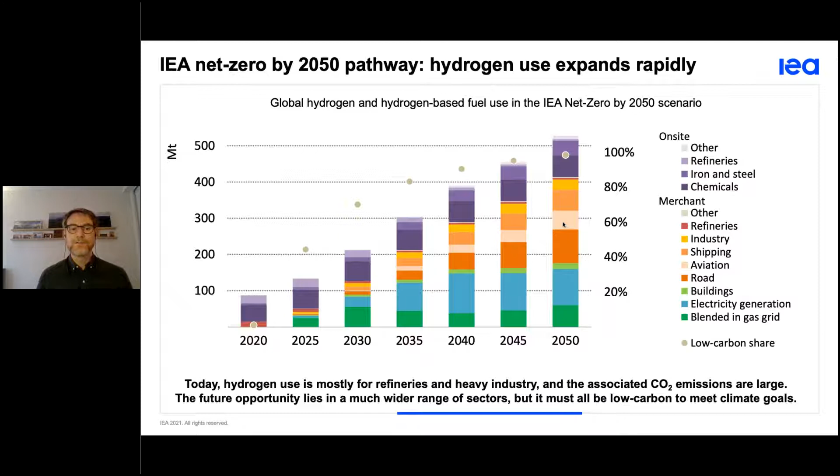So if we are seeing this amount of hydrogen in our model, there must be a good reason. And I've taken a moment on the next slide to put together the reasons for that. Why is there so much interest in hydrogen at the moment when perhaps there wasn't a huge amount of interest 5 years ago, let's say? And it's still the case if you do a Google Trends search on hydrogen, you'll find a much bigger peak around 2004, I think, than you find today. But there was a trough, and now there's an enormous amount of interest again.

And the main reason is just that if you use hydrogen for energy, whether you're using it in a fuel cell or combusting it, it does not produce carbon dioxide. And that's crucially important when we start to talk about these pledges that countries are making that aim for net zero emissions by 2050, in the case of China, 2060. That is really forcing attention onto pushing fossil fuels right out of the system at the point of consumption, and it forces people to really think about the role of hydrogen. If countries are making a net zero pledge, clearly Canada is one of those countries, but they're not the only one, then they're in the world of the 500 million tons of hydrogen in our model.

I have then said, okay, well, let's unpack that a little. Why hydrogen in terms of the things that it can do for us? And we think that there are 6 reasons why hydrogen is tackling challenges that it's very, very hard to tackle in other ways. Hydrogen is reaching parts of the energy system that are hard to decarbonize, so-called hard to abate sectors in some cases. In other cases, it's related to flexibility.

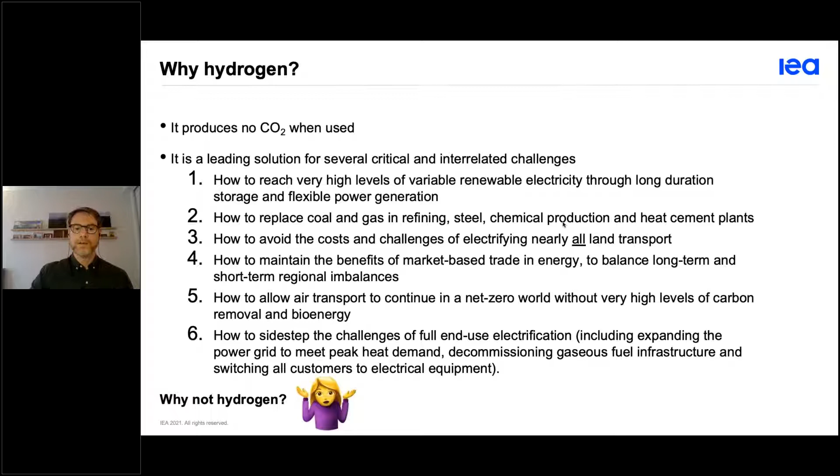So I am going to now just shift gears a little bit, try and give a bit of a rundown of where we are today and then a couple of the challenges that are faced. We are producing at the IEA this year our first global hydrogen review, which will be released in September, which is going to become an annual publication that's going to track hydrogen. We've previously been tracking bits and pieces of hydrogen in our investment reports and other parts of IEA outputs. We're going to bring it all together. And here's just a quick summary of some of the things that we see on that dashboard.

The momentum around hydrogen is really unprecedented. And I think it's really worth saying that this could be a hype cycle, but it's going to be a much bigger one than we have ever seen before, and it's unlikely to break and go back into the trough that we saw maybe 5 years ago. We've got countries that are publishing hydrogen strategies. Canada is one of them, but we know of 18 under development that would take the total to 30 around the world.

I've been this week trying to add up some of the equity that's been raised by hydrogen companies, whether they're startups or some of those that are post-IPO. And I think that since 2019, around 8 billion has been invested directly in companies that are producing hydrogen equipment as their main line of business, which is quite remarkable, to be honest, for a technology or a market that isn't really off the ground yet.

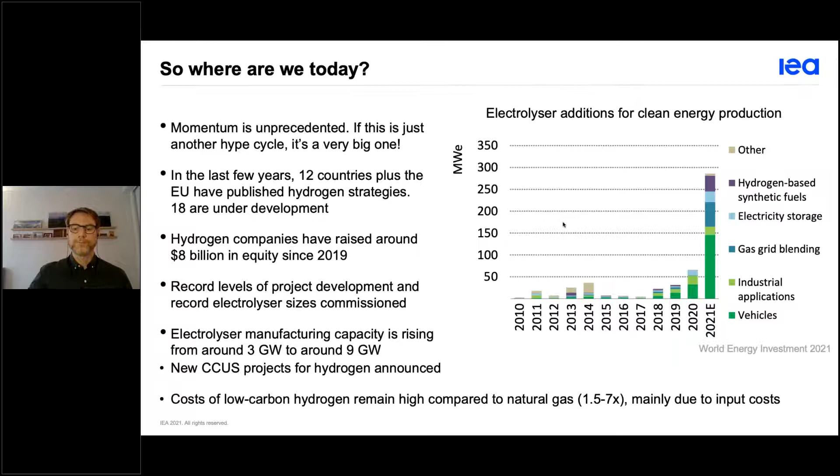So I'd like to leave you with a few thoughts on where next for hydrogen. I mentioned the Global Hydrogen Review already. That's our little where next, but that's going to include some policy recommendations. And we're going to be talking about things like how do you create bankable and dependable demand for the equipment in particular, for getting these investments in the supply chain that allow the manufacturing capacity to get built.

And we've really seen some quite remarkable developments. Countries like Germany, just yesterday, I think it was, announced a new auction mechanism that would give people certainty over the price that they might be expecting to get for hydrogen produced, and try and stimulate demand for the equipment itself. We think that the equipment, the manufacturing of the equipment is the key thing to watch.

But on the demand side, existing hydrogen demand is the right place to start, where the infrastructure is already in place and disruptions to contracting in the value chain can be minimized. I just wanted to mention that the CEM Hydrogen Initiative of the Clean Energy Ministerial, which the IEA runs, is looking at that in relation to ports in particular.

Certification of hydrogen is my number two, and the International Partnership for Hydrogen Economy is the intergovernmental group that is looking at that. And we'd like to see that cutting across all low carbon gases and looking at upstream methane emissions and biogas alongside hydrogen certification and renewable green certificates.

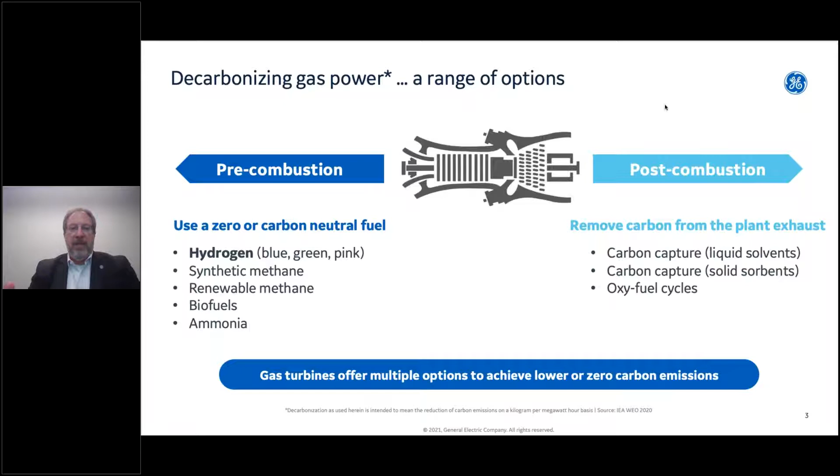But we also should recognize post-combustion. And post-combustion basically says, don't change your upstream fuel infrastructure at all. Continue burning natural gas as you've done in the past, but before the emissions from the gas turbine reach the environment, capture them. And there are a lot of technologies available today using both liquids or solids that have an affinity for capturing carbon. And once you've captured the carbon, you put it to industrial use. You can use it for enhanced oil and gas recovery, or just do sequestration and storage. So lots of technologies that are available here, again, if we think of this as a suite or an ensemble of tools.

One of the questions that we get asked a lot is, can you leverage hydrogen as a power generation fuel? And the answer is, not only can you do it, it's been done for 30+ years all over the world. General Electric, as an example of the industry, has more than 75 gas turbines that have run on hydrogen or hydrogen blends. Those units have accumulated more than 6 million operating hours in a variety of traditionally industrial type sectors: steel mill, refining, places where there has been extra hydrogen, either as a waste product or such. And we've done it from concentrations as low as 5% all the way up to 100%.

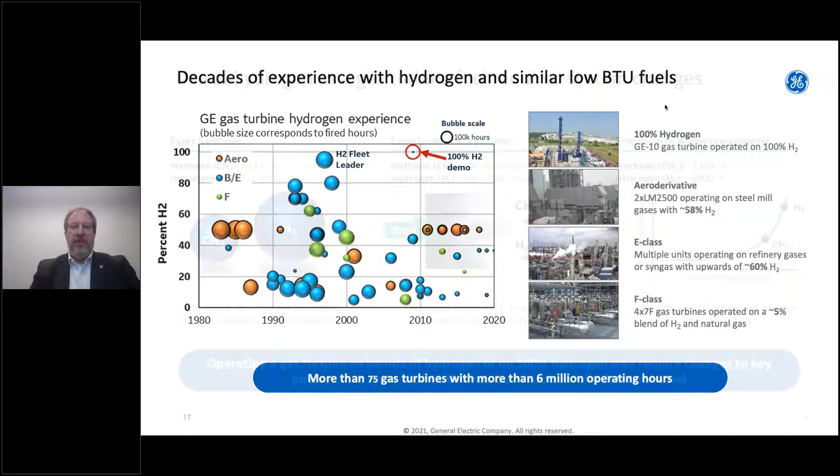We have gas turbines that have in excess of 100,000 operating hours on fuels like this. And so this is not a new concept or technology. What's new is that we're not talking about a waste fuel. We're now talking about intentionally generating large amounts of hydrogen for the sole purpose of using that as a carbon-free or low-carbon fuel for producing power. And that's the real change in the industry. The gas turbine ultimately doesn't care whether it's blue hydrogen or pink hydrogen or gray or white. It only cares what comes into it in terms of energy content and composition. So that's just good news as we think about leveraging this technology and reaching our zero carbon or net zero carbon goals.

I want to reflect on the fact that hydrogen is not a drop-in fuel. You just cannot take hydrogen into an existing system, whether it's an internal combustion engine or a gas turbine system, and just swap it out for methane. It has different energy densities, it has different combustion characteristics, both in terms of reactivity as well as the temperature it burns at, and those have implications we need to consider as we think about entire power plant configurations, entire power plant designs.

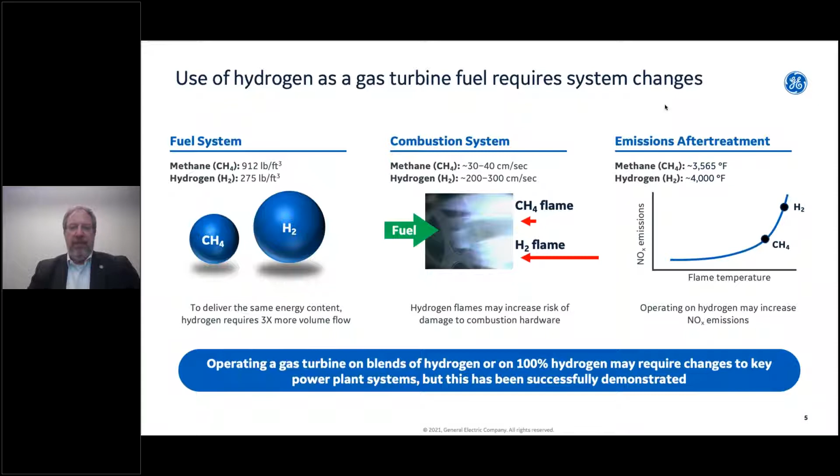We need to be cognizant of that. The good news is you can make changes to systems and you can update systems accordingly. So we're not talking about a carbon lock-in scenario. I want to give just 3 examples here as a way to kind of answer questions that we regularly get from customers and developers and regulators around the world.

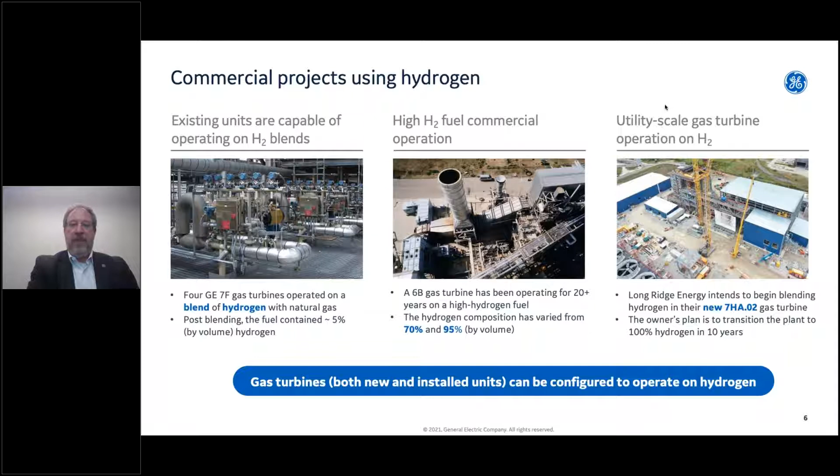What I'm very proud to announce today that I could not put in the draft presentation was GE has now publicly announced a project we are doing in Australia, very similar to this Long Ridge project, where we are going to take a brand new gas turbine, sorry about that, a brand new gas turbine in Australia, the Tallawarra B project. And this project, when it goes into commercial operation, will again start using a blend of hydrogen and natural gas for the purpose specifically of reducing the carbon footprint of that plant in support of renewables. So this concept of using hydrogen as a way to start achieving our net zero goals is very critical.

But I think what Simon mentioned earlier is also true. We have to recognize this trilemma of production, infrastructure, and cost. In order for hydrogen to be viable as a power generation fuel, we have to produce it at very high scale. We have to be able to transport it to the point of end use, whether that's power, whether that's for electrifying industries where heat is required, or to decarbonizing industries where heat is required. And it has to be at a rational, competitive cost. The reason you don't see power plants burning hydrogen today is not because the gas turbines can't do it, it's because you can't get hydrogen at a supply at a price point that makes it viable.

So, we talk about blue hydrogen and green hydrogen, but if you think about how much hydrogen you'd need just for the power sector, it's multiple times more than the world already produces today. So if we're talking about using hydrogen for power in a net zero world, we have to think about huge increases in production and infrastructure to make this happen.

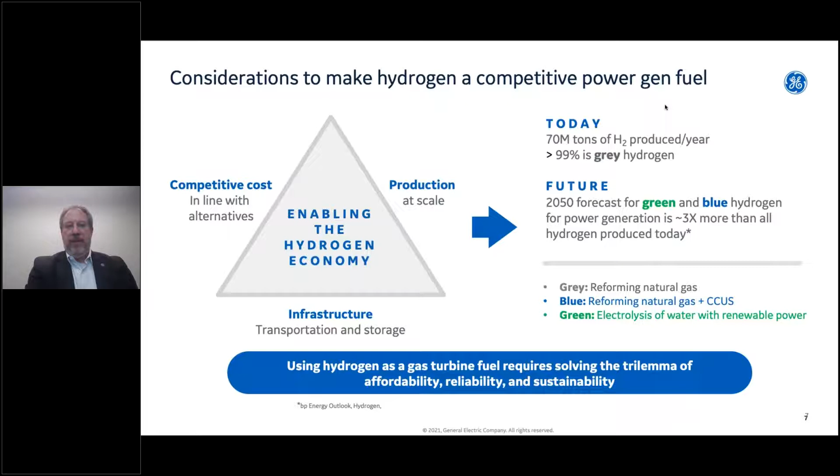Look, I wish we had hours to talk about this topic. Unfortunately, we don't today. For those who are interested in learning more about the use of hydrogen in a gas turbine beyond what we can talk about today, the use of carbon capture, GE has published multiple white papers. I encourage you to take a look at those.

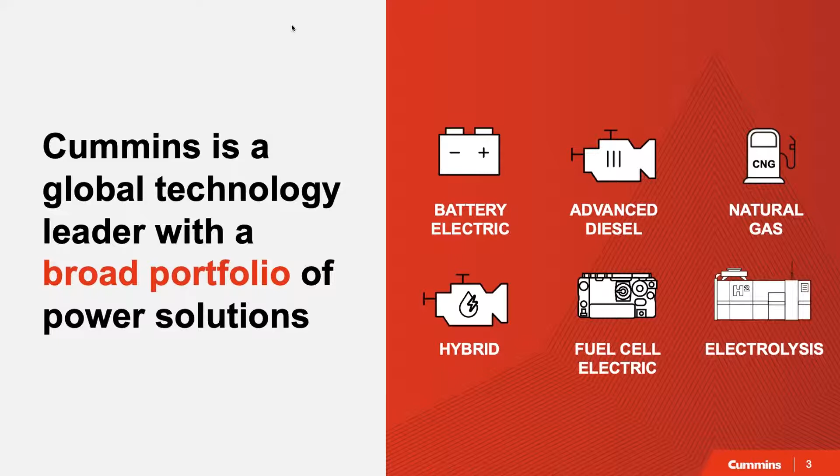And I also wanted to talk a little bit about why we've invested in all of these different technologies that I just mentioned, advanced diesel, battery electric. That's because you saw our diverse markets, and each of them really does require unique power needs and unique job needs. These are work vehicles, not passenger vehicles, or applications that are critical in the field. For example, we do power generation for Army bases in Afghanistan and other places. So it's really critical that the power is there when needed.

And so we've got teams, we have over 25,000 employees in the US, over 60,000 globally. And so a lot of engineers focusing on solving some of these problems that Simon and Jeff have talked about previously.

And so I also wanted to talk through our commitment to decarbonization as a company. We've set what we call our Planet 2050 aspirational target of net zero carbon emissions in all of our products, facilities, and operations, and having a net positive impact in every community in which we operate. And to meet these really ambitious goals, we also have 2030 targets that are more specific and provide for real targets that we intend to meet.

And so as we look through how can we accomplish these really ambitious decarbonization goals, hydrogen was just seen across the company as a key enabler in these spaces. And I'll talk a little bit about some of those technologies more specifically that will allow us to reach those decarbonization goals. So batteries obviously have gotten a lot of support, especially in North America.

That seems to have taken off a little bit more quickly, especially in the transportation applications where we operate. And there are certainly applications where battery electric vehicles make sense and they're a great technology. Those are things that don't carry a lot of weight, things like transit buses or school buses, medium duty trucks, terminal tractors, material handling equipment, things that have time to charge every night, predictable applications.

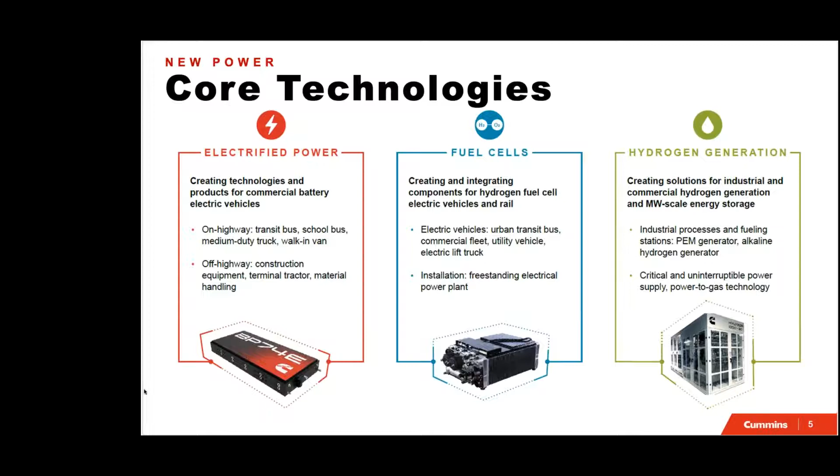I'll talk a little bit about where you can see some of our electrolyzers and the work that we're doing there, but we're creating solutions for industrial and commercial hydrogen generation right now at megawatt scale, but with the ability to scale even further. And we do have all sorts of technologies. Of course, the focus has been on PEM, but alkaline and even solid oxide. So really investing throughout the value chain.

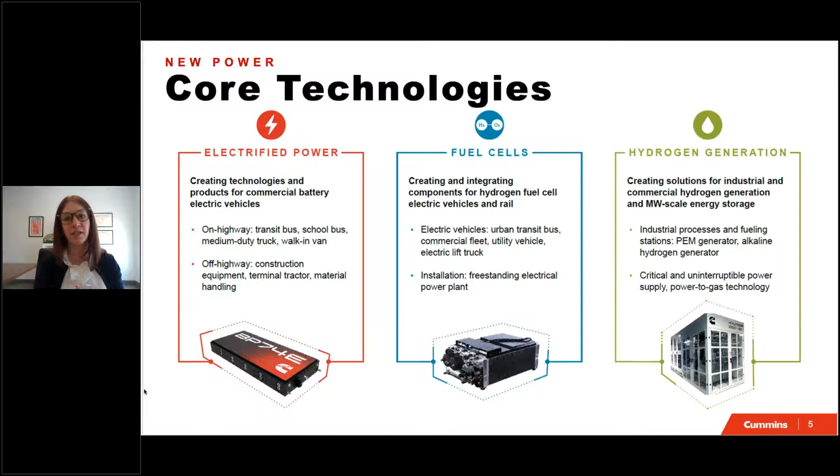We've also partnered with a tank company, NPROXX, to really optimize hydrogen storage in a lot of these different applications. So when I tell you that we at Cummins see hydrogen as the key enabler, we are investing heavily. We really do think that this is a key element to decarbonize our operations.

Cummins is now the largest provider of hydrogen fuel cells for rail applications, and these are passenger trains that are running right now in Germany, with plans to deploy in Austria and France and other places in Europe. And we've also had really promising conversations here in the US, where I sit in Washington, DC, with the Department of Transportation and others about ways that we can decarbonize our rail with hydrogen.

And I'll note that in some instances, if you're doing electric power only, there's a lot more infrastructure requirements; putting electric charging on rail where it doesn't already exist is a really significant investment. And if you can use hydrogen and fuel cells, it can be a more cost-effective solution to completely decarbonize those applications.

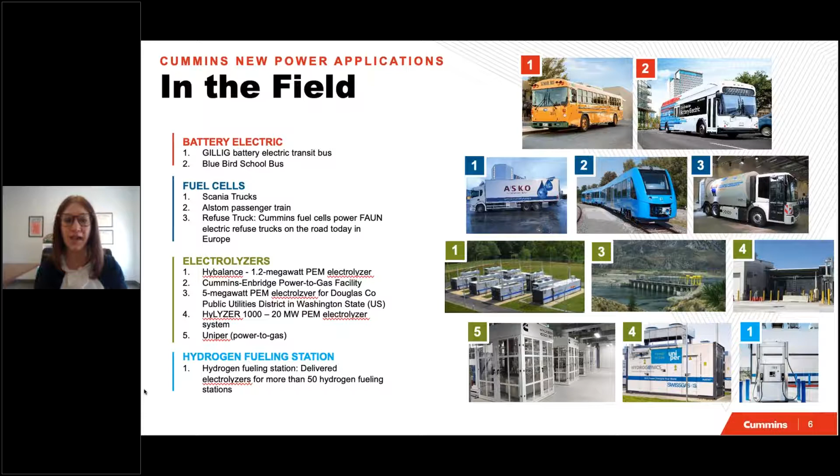And then I wanted to point out the second row and the third row, and those are our electrolyzer applications. And you can see that we have some power to gas applications with Enbridge. We have a 5 megawatt PEM electrolyzer, the largest in the US, in Douglas County, Washington, and actually the largest in North America is in Canada in Bécancour. And this is the largest PEM electrolyzer in operation in the world right now.

It's a 20 megawatt system generating green hydrogen, or, since we're trying to de-emphasize the colors in some instances because it can be confusing, renewable hydrogen. And our system is installed at the Air Liquide hydrogen production facility in Bécancour in Quebec. And right now it can produce over 3,000 tons of hydrogen each year, and it runs on hydropower.

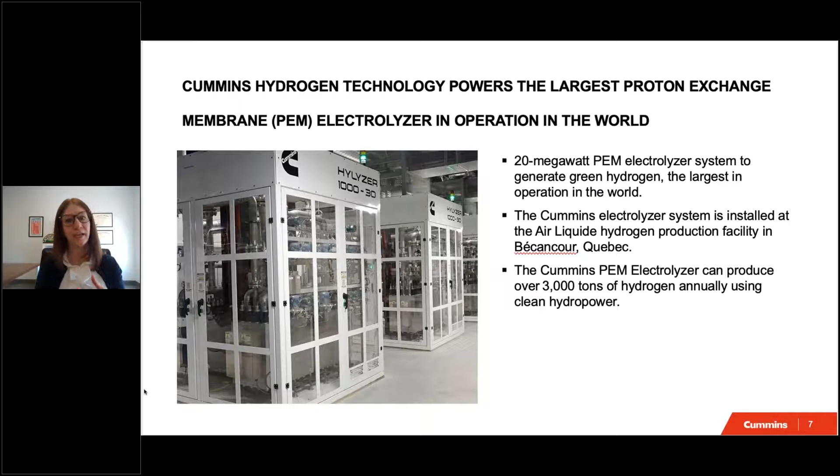And so we heard from previous speakers about the real importance of cost in achieving scale. I mentioned our electrolyzers in Douglas County, Washington, and in Bécancour, and they both run on hydropower, and that's because of the cost. It is a relatively cheap renewable, so it makes a lot of sense to use that to generate hydrogen. So as the cost of renewables goes down, we can really achieve a more significant scale. And then I wanted to focus on my real bread and butter in the work that I do, advocating with governments for hydrogen policy to accelerate deployment.

And we look at these things that I've laid out here as the real building blocks. These are global, right? These are things that can be done in every country. They're not specific to any one tax structure or mechanism that any one country has.

But the first thing that we advocate for is the importance of national strategies. And I know that we have regional strategies in Canada. The US is behind on this. There's an industry strategy. The Department of Energy has a strategy, but there is no cross-government strategy that sets targets to implement.

And I'm seeing that my camera went out, so I'll click that again.

It's also critical to reduce demand uncertainty. And one way that we can do that is to not only set those targets in the national strategy, but to also create mechanisms by which we facilitate deployment of technologies for that hydrogen offtake, whether that's in fields like fertilizer or ammonia, or even in the processes that are currently using gray hydrogen from SMR.

It's also critical to invest in infrastructure. So we're seeing in the US some movement on that, whether it's through the Biden American Jobs Plan or some of the other actions that the administration is trying to take. But really, hydrogen is only useful as you can use it, as the infrastructure exists.

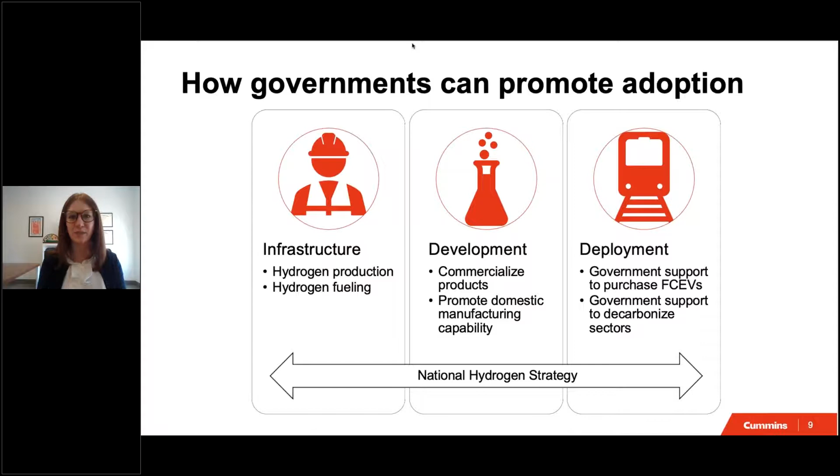Happy to answer any questions about it. Of course, I've got a real book of policies that we suggest governments adopt, but given my limited time today, I just wanted to lay out what we really think the key pieces are there. So really do appreciate being invited and able to speak to you all today. Thank you. Oh, national strategies, I did have more.

Yes. Thank you, Tracy. That was really great. I'm sure everyone will agree that government does have a huge role in enabling the technologies and uptake of technologies through policy and regulation. So I think that's still a developing area that we're going to see emerge from hydrogen.